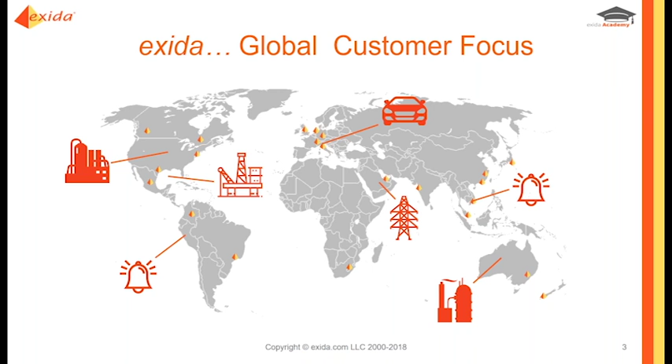We are a global company. We've recently added our India office in Mumbai, but we've been around, as I said, for nearly 20 years and have a pretty good presence around most countries in the world.

So how do we measure our success? Well, we've got the leading market share globally for safety device certification, and also we've done more cybersecurity certifications than anybody else right now. We're not just owned by two people. The original company was started primarily by two people. It's now nearly completely employee owned, and that's intentional, because people might think that if the two founders retire, that's the end of exida. No, it's not. They're actually engineering that very process to make sure exida continues and remains in a very strong position. We've got more than 100 global experts worldwide, over 500 years of combined knowledge and experience, and we've done 1,000 certification and assessment projects and modeled over 500,000 SIFs. So it's a pretty reasonable statistic.

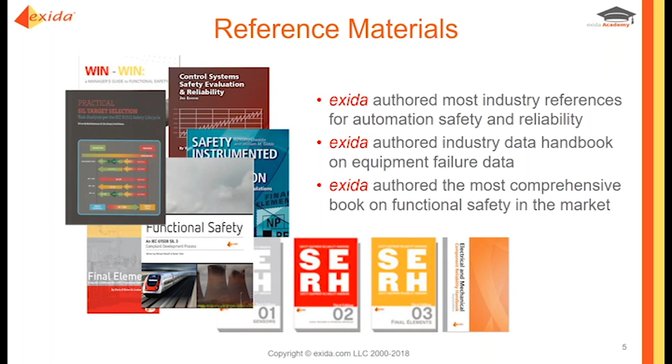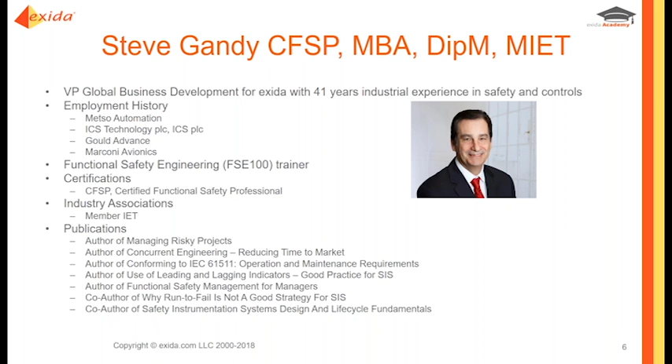A little bit about me. Some of you know me already. I've been in industry over 41 years now, mostly in the functional safety world, but also in the DCS world. I'm responsible for our end user services business, plus I also teach a lot of the functional safety engineering FSE 100 courses. I've written quite a few papers and publications, and you can always find my webinars on the website as well.

Okay, so much for the introduction. Let's get to the meat. So, functional safety management, FSM for managers.

So the first thing that managers need to know, especially if they're working for an organization that comes under COMAH in the UK, or comes under OSHA in the US: this requires operators of hazardous processes to follow best practice. So what is best practice? Well, often called RAGAGEP in the past - recognized and generally accepted good engineering practice. This really relates to IEC 61511 for the process industries, whereby this is recognized as being best practice.

1511 is built around a safety life cycle, and the safety life cycle has three primary phases. There's the analysis phase, where we do our risk assessment and risk analysis, understand what our hazards are and the consequences of those hazards, and look at what mitigation or layers of protection we can put in place to help reduce those risks. Then we go into the design and implementation. This is where, if we determine we need a safety instrumented system with safety instrumented functions with target SIL levels...

...then we have to design it and create an SRS initially, follow that safety requirement specification, and make sure we implement the system correctly. Then we have the operation and maintenance phase, where we install, commission, and basically start our operations. This is where the old adage of 20-20-20 comes in: 20 weeks in design, 20 months in implementation, and 20 years in operation. That's typically what the old footprint used to be.

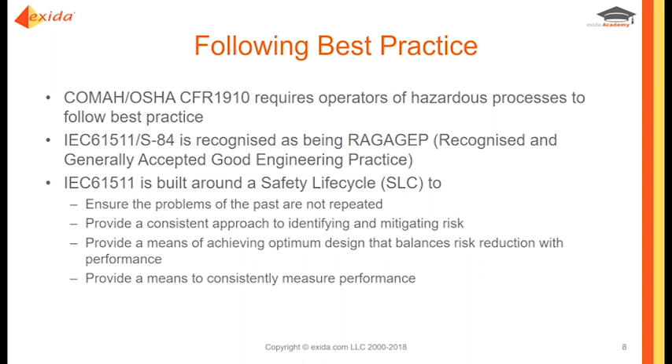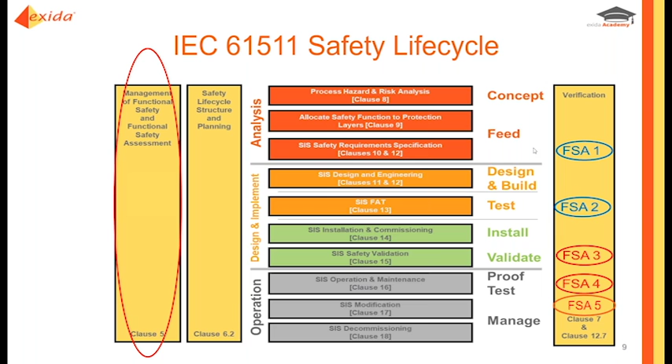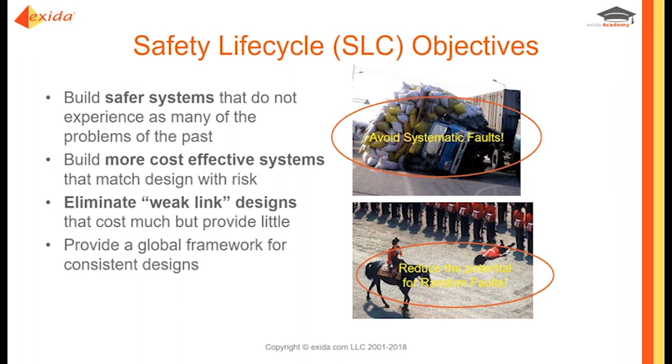So the objectives of the safety life cycle are to avoid some of the problems of the past, where we may end up with expensive over designs, or worse, expensive under designs that don't achieve the amount of risk reduction we're trying to get to. The purpose is to help us avoid systematic faults and reduce the potential for random faults. Functional safety management specifically targets the systematic side of things, which we'll talk about in a minute.

So why do we focus on systematic? Well, because studies were done. The HSE, the Health and Safety Executive in the UK, did a study in 1995, then redid it in 2003, looking at the causes of accidents involving control systems. There wasn't a huge difference between what they found in 95 and 2003. What they found is that 44% were attributable to specification issues—whether it was a bad specification, incorrectly specified, or didn't cover everything—but 44% were due to specification.

A further 15% was due to design and implementation. Well, of course, if the specification's not right, you can hardly expect the design and implementation to be right either. A further 6% were installation and commissioning, but on the O&M side you can see there's 15% due to maintenance, but 20% for changes after commissioning. So this is another area where we have to focus particularly, and where functional safety management is very important.

And this has been recognized by the IEC, and the 2016 standard puts a lot more emphasis now on functional safety management.

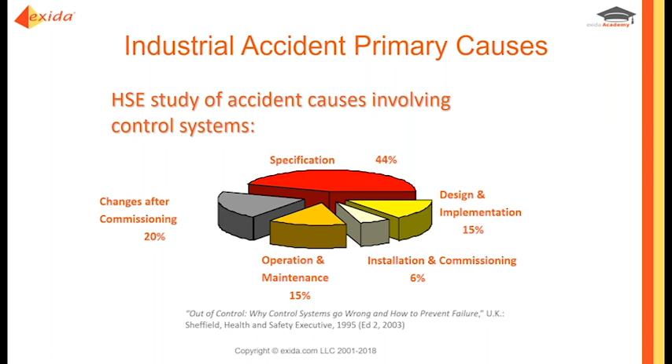So we know that we have to manage risk, and the ALARP model is very familiar to a lot of people. What does ALARP mean? Well, it's as low as reasonably practicable, and that's a lovely English term, because this was devised by the Health and Safety Executive. So what this shows is that we should be trying to ensure our risk is within the ALARP tolerable region, which is between 10 to the minus 3 per year for workers—in other words, 1 death per 1,000 years per worker, down to 1 death per million years per worker. And for the public, it's 10,000 years to 1 million. So of course most companies try to get into the 10 to the minus 5, 10 to the minus 4 range. But this is how we define whether we're in our acceptable region.

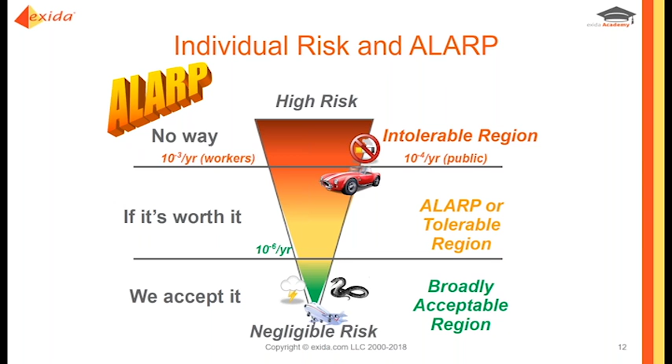And of course it really depends upon the company and its culture and its stance towards taking risk or not. And dear old Trevor Kletz, who's no longer with us, who was the old ICI guru, and also was at Texas A&M, he used to say, if you think safety is expensive, then try an accident.

And here you can see this is a table taken from our practical SIL target selection book, which looks at the accidents that have happened since the 80s. If we go back to '89, some of you will remember it, some of you won't because you weren't around—the Exxon Valdez oil spill in 1989. Nobody was injured and nobody killed, but the overall estimate was about $8.5 billion back then for the cleanup. So nobody killed, nobody injured, but still $8.5 billion.

The Olympic pipeline explosion in '99, there were 3 fatalities and 8 injuries. The overall estimate was greater than 160 million. Property damage was around 45 million, but 75 million was paid to the families of 2 boys who were killed. They were playing near the pipeline when it went up. As a consequence, 2 former Olympic employees pleaded guilty to felony pipeline safety charges, and they received jail terms.

Then there was 36 million in civil and criminal penalties as part of a deal with the federal prosecutors. So again, if you think safety is expensive, try an accident.

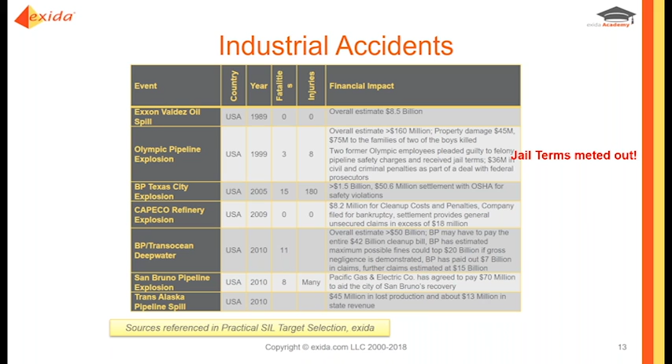This is the other thing that can happen. If as a manager you are responsible for cutting costs, and as a result of that cost cutting leads to problems with maintaining safety, and there's an incident and people are killed, you could end up going to jail. And all of this reflects a poor safety culture.

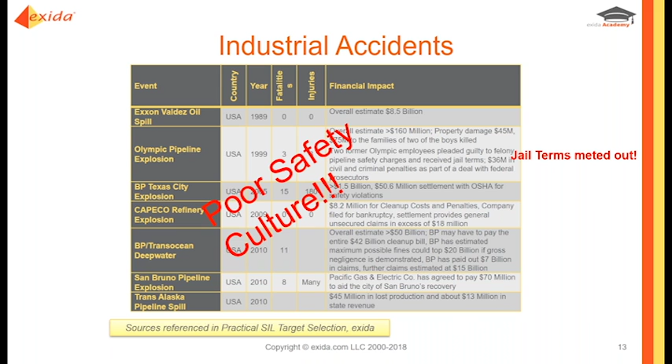So commitment to safety, the culture has to come from the management team. It has to come from the top all the way down. It's no good the people who are trying to implement functional safety if management is continuously pushing back saying, why do I have to spend money to replace that equipment when it hasn't failed just because the manufacturer says I need to replace it? These are the sorts of arguments and conversations that typically occur.

So the purpose of functional safety management is to, as I've said, govern the whole life cycle, not just the analysis phase or the design, but the whole life cycle.

And now we have to make sure we allocate life cycle responsibilities. So the new version of the standard is very, very specific about roles and responsibilities. So when you're doing your functional safety management planning, you need to consider who needs to be in what role, what their responsibility is for given activities in the life cycle, and more importantly, are they competent and trained to do that? Then you have to develop procedures and make sure everyone is trained and competent.

So the point is we need functional safety management to help us manage the risk of systematic faults. And if we have poor functional safety management, then we can expect to have higher systematic issues.

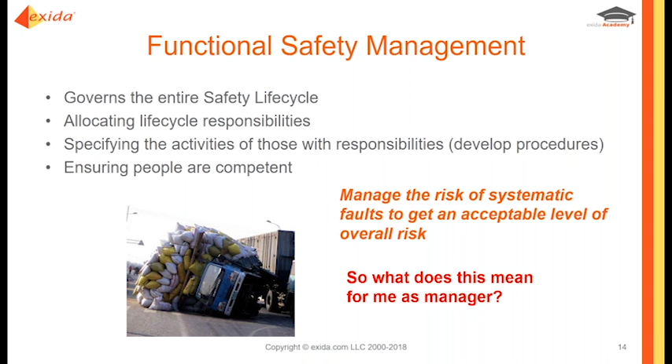So again, what does this mean for me as a manager? Managers need to be able to demonstrate competence themselves in terms of having the requisite knowledge of the legal and regulatory functional safety requirements. They need to have some knowledge of what OSHA requires, if it's an OSHA PSM, or COMAH in the UK, and they need to have a knowledge of the standard itself to understand why things are done and when they are done.

They obviously need to have adequate management and leadership skills appropriate to their role in the SIS. So if it's a plant manager, the plant manager has overall responsibility for the site, the plant, the personnel, and that also includes any safety systems. So the plant manager needs to have an overall feel and understanding for why things need to be done from a functional safety perspective, and also to understand potential consequences that could occur.

Managers also need to read incident reports. So in the case of Texas City, for example, there were lots of incident reports and internal audits done highlighting all these problems, but management either didn't consider them significant, didn't want to consider them, or just didn't care. And this is where the culture plays a really strong role, because if managers see incident reports or audits highlighting problems, whether it's problems with training, faulty equipment, or false trips, all of that needs to be considered.

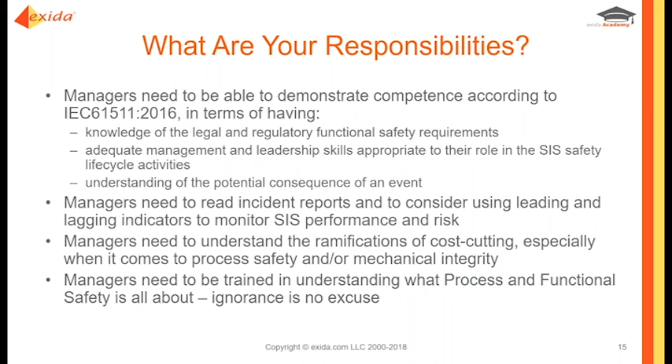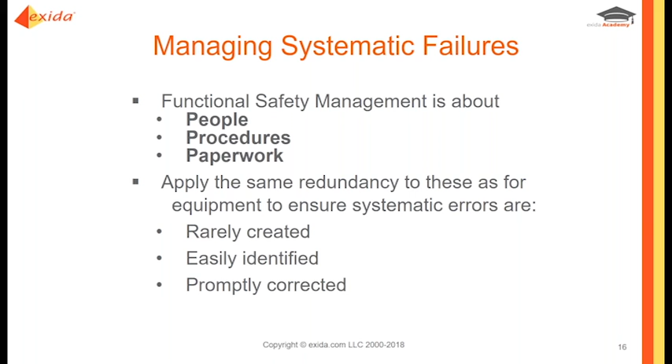So, managing systematic failures. Many of you have been on the FSE 100 and know I talk about the 3 P's when it comes to this - people, procedures, and paperwork. This means we have to make sure our people are properly trained and competent to do the work we are requiring them to do for the SIS and the safety lifecycle.

Secondly, procedures - are the procedures in place and being followed? We have to make sure procedures are correct and that they're being followed. And of course, the paperwork is the 3rd P, to prove that we are following them - documenting testing, documenting repairs, making sure we follow procedures.

We would tend to apply the same redundancy to these as we would for equipment. So we might say, for example, if we require some critical safety equipment to be calibrated, the procedure has a 4-eyes requirement. The person responsible for doing the calibration carries it out, and then a supervisor or senior person comes and checks it, just to make sure it's been done correctly. In that way, if we do this right, we won't create problems, or rarely create problems, and we can easily identify when we do and correct them.

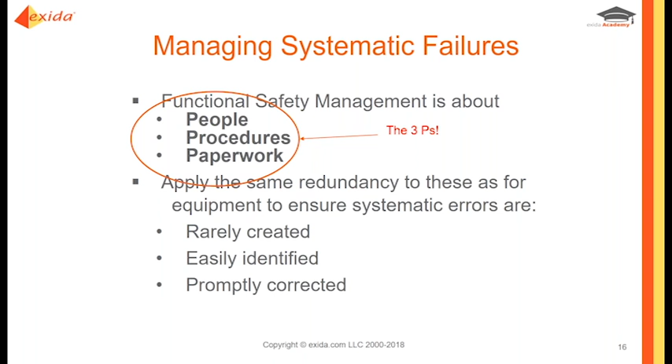So what enables us to do that? We have 2 tools at our disposal - functional safety assessments and functional safety audits.

The purpose of the functional safety assessment is to provide us with an independent - and that's the key word, that's why it's caps and bold - independent and diverse cross-check of safety lifecycle work. In other words, if people have been doing some of the design work, they shouldn't be involved in doing the functional safety assessment. They shouldn't be responsible for it. They might be asked to get involved, but they should not be responsible for doing it. The purpose is to see whether the SIS, Safety Instrumented System, meets the safety requirements specification and actually achieves functional safety.

This is very important - we have to make sure that the as-designed and installed SIS with its SIFs will actually achieve what we want in terms of risk reduction and providing the necessary functional safety. Membership of the assessment team should include at least 1 senior competent person who's not involved in the project design, for stages 1, 2, and 3, or not involved in operation and maintenance for stages 4 and 5. When should an FSA be carried out?

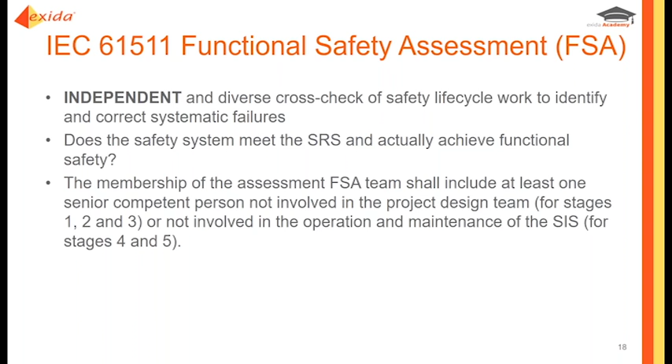This is an interesting one because some people get very confused with what's written in the 2016 edition. They think, okay, we just need to do FSA 3. The way the standard is worded would tend to suggest that, until you read further.

5.2.6.1.4 says an FSA team shall review the work carried out on all phases of the safety life cycle prior to the stage covered by the assessment that have not already been covered by previous FSAs. So what does that mean? It means if you're going to do your first FSA as FSA 3, which is one of the mandatory FSAs you need to do, then you have to make sure as part of FSA 3 you cover FSA 1 and 2 if they were not done before.

This is very important, because FSA 3, stage 3, is after commissioning and validation prior to startup. So if that's the place where you do the first functional safety assessment, you are running significant risk, because if there are problems, you cannot start up. Fixing the problems becomes far more expensive and can result in costly delays.

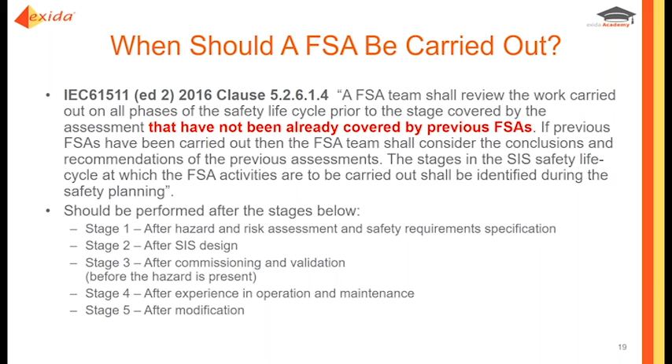And then after modification, we need to do a stage 5. The purpose is to make sure any modifications are properly assessed from a safety point of view. If it has an impact or ramification on the SRS, we have to make sure the SRS properly reflects any changes. It also says that if you have application logic changes, then all the SIFs affected by that change should also be reassessed.

So the functional safety assessments are there to help us manage systematic issues. They should not be missed. Certainly you have to do an FSA 3, but if you do FSA 3, you've still got to cover what FSA 1 and 2 are supposed to do. So you might as well do FSA 1 and 2.

Functional safety audits, on the other hand, are different from a functional safety assessment. The purpose of the audit is to ensure that the functional safety management systems in place are up to date and are being followed correctly. This is where we dot all the I's and cross all the T's.

As with any audit, any deviations or discrepancies need to be highlighted and corrected within a reasonable time frame. As part of our functional safety management, we would specify how much time we allow for any deviations or discrepancies to be corrected. So those are the 2 key tools.

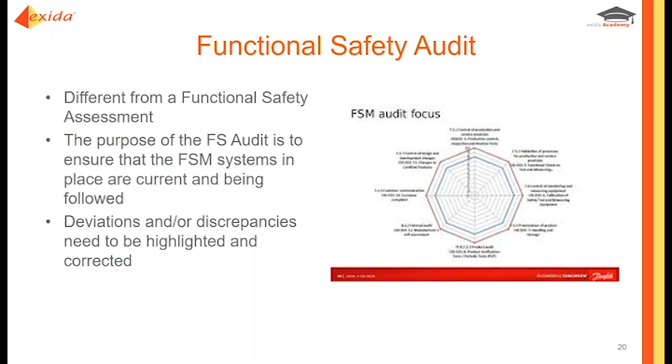When we're looking at functional safety management, it really does depend upon the company safety culture. Because if the company, in this case senior management and mid-level management all the way down, are not committed to functional safety or process safety, it's going to be very difficult for the guys at the coalface to implement functional safety correctly.

Also, it's about planning. There should be a safety plan. You need to create a functional safety management plan. How are we going to ensure functional safety, and how are we going to manage it throughout the life cycle? This is where roles and responsibilities come in, and we also need records of personnel competency and any training that's done. These people assigned particular roles, are they capable of doing that?

And then, of course, documentation and documentation control is very important, making sure we carry out our audits. Here again, the standard doesn't define how often you need to do your audits. That's something you would need to define yourself.

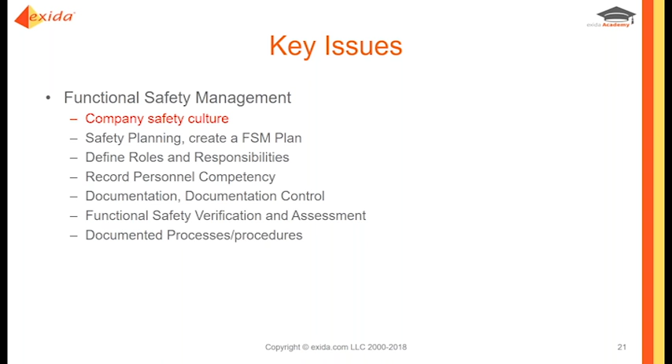Functional safety verification and assessment: how are we going to ensure that once we've got an SIS designed, how do we test it? How do we make sure it meets requirements? And then once it's installed, ongoing maintenance - how are we going to ensure that we do that? And then you document your processes and procedures.

So the objective here for functional safety management is not necessarily to reinvent the wheel. I've had conversations with several companies where I've explained that we can look at what quality management system is in place. Most end users will have some form of ISO 9000 quality system in place, and they may already have quite a few elements of a functional safety management program, but they're just not calling it that.

So you can create a document called a functional safety management plan. You can refer to existing procedures that you have. If there are gaps, usually we can come in and do a fairly quick gap assessment, it's easy to plug those gaps, and then you have your functional safety management plan in place.

So the management activities and the technical activities would be defined as what you need to do to maintain functional safety. This will cover things like performing functional safety assessments and audits, and making sure people are properly trained and procedures are in place.

So how do we do this? We could appoint one or more persons to lead the functional safety activity. They will require management support, whether that's the plant manager or the process safety manager, whoever's responsible, they need to be supporting this, but they also need to have a sponsor from the executive committee or the board. You develop the functional safety related procedures, and then you plan, execute, audit, and improve. Normal management stuff.

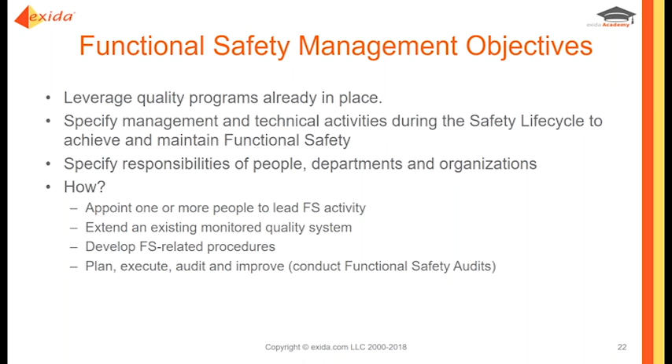You need to encourage your personnel to keep their eyes open, make sure if they see something that's not right, that they have the authority to be able to stop things before it leads to any incident.

So roles and responsibilities, as I said, this is something that's been strongly emphasized in the 2016 edition. This means it has to be clearly delineated and communicated. If somebody's responsible, they need to know they're responsible, and they need to know what is expected of them. So there needs to be a definition of the role, and that has to occur for each phase of the life cycle and the activities associated with it. This is one of the specifically noted primary objectives of functional safety management, is roles and responsibilities.

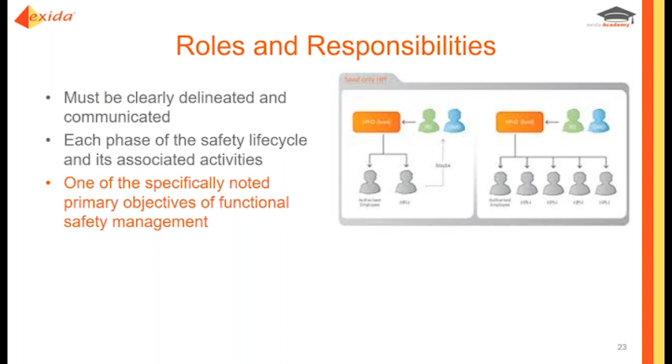And here again, we talk about the 4 R's: the right data, the right format, the right time, and the right place. Because very often problems occur during transition. For example, you might have one group responsible for doing the analysis phase and another responsible for design. The information that's transferred across, which should be the SRS, should be in a format that they can handle and should be complete up to that point, so it has all the right information. If not, you could end up with potential systematic issues creeping in.

Okay, so let's just summarize. 61511 defines that a functional safety management system has to be put in place to manage the safety lifecycle activities. That is a requirement, you have to have an FSM. And managers need to know this, and managers need to be responsible for ensuring that this is followed.

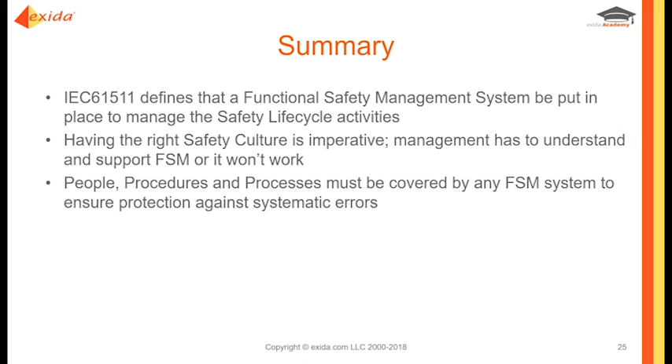And then the functional safety assessment and functional safety audits are required to ensure that our procedures and processes are being followed, but also it's good practice to make sure that we're continually improving, making sure that if we find issues or problems, or if we can...